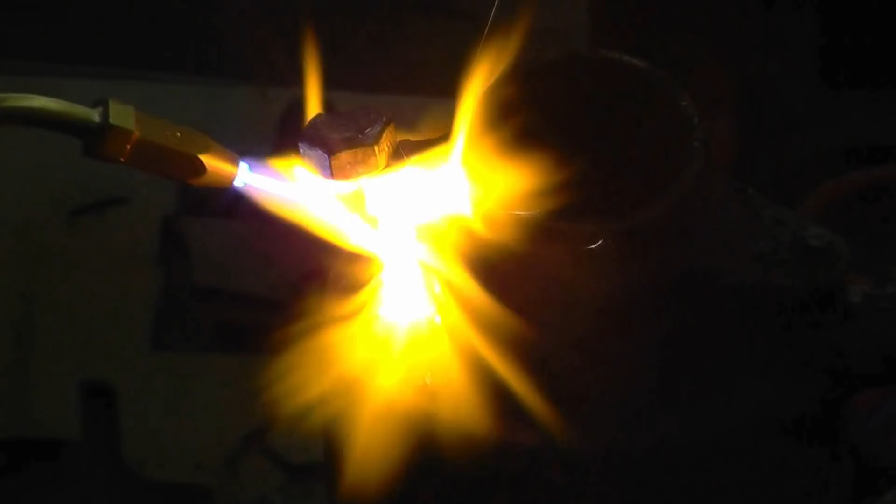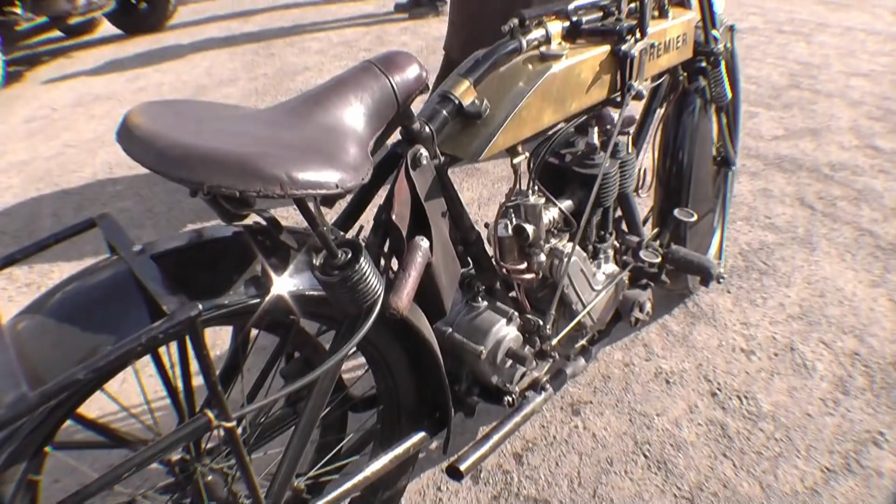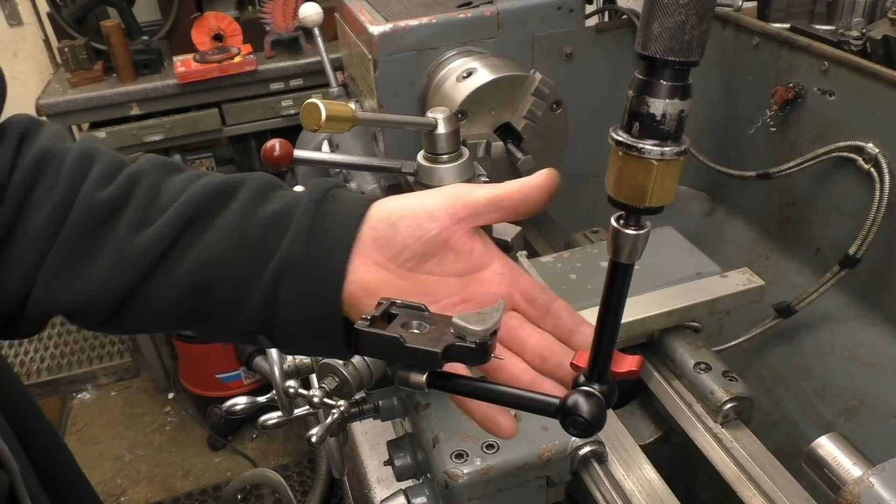I've had several people asking what sort of camera mount I use when I'm working on the lathe. This is what I'm using at the minute. I did have a ball end type affair on here, but I bought a cheap mag mount, or at least a cheap flexi arm that came with a mag mount on it, and I put a universal camera base mount on there. All my cameras fit into there. Depending on what I'm doing depends which camera I use.

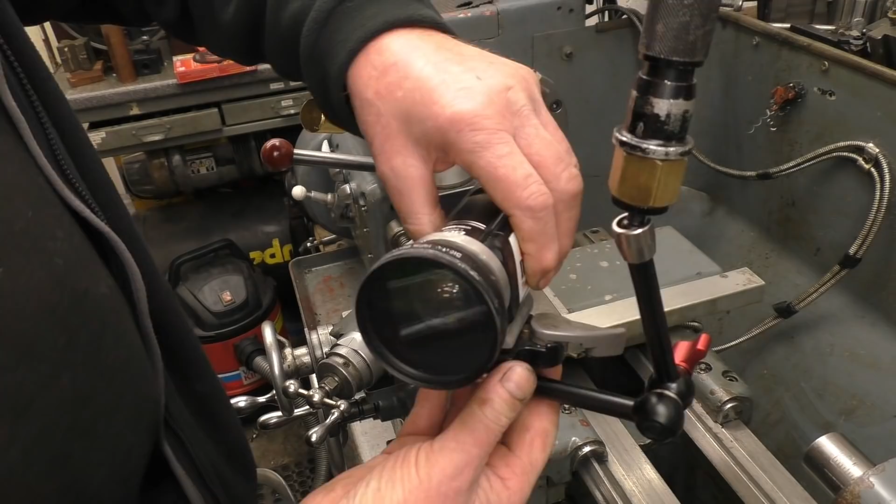The camera basically clips in. It's a fast release thing, so I can basically put this camera anywhere I want at any angle, and I can slide it along to get right in up to the chuck, basically anywhere I need, which is much better than trying to climb over the top of a tripod, which is what I used to use. So basically that's it.

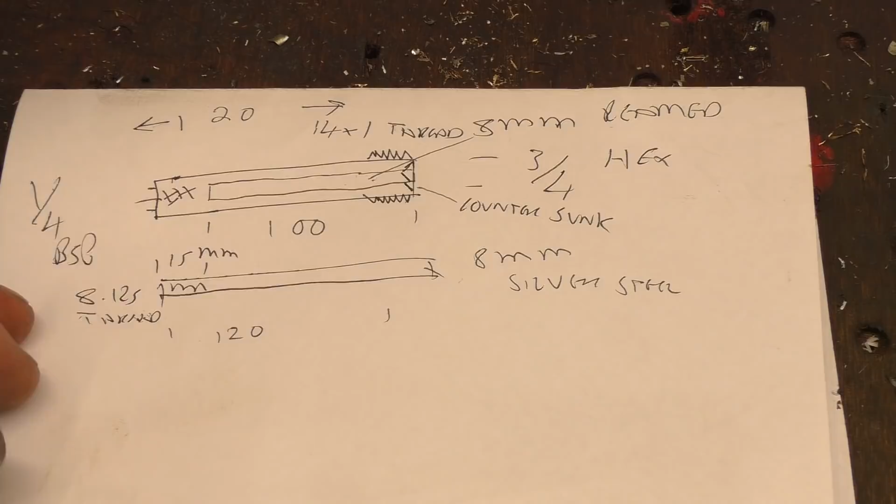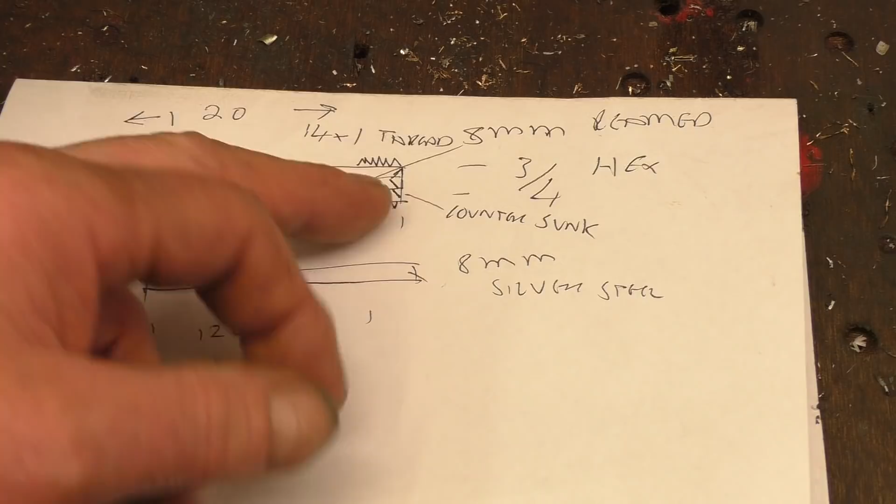I've got a rough sketchy type drawing here. It's a lot better than what I sometimes get. It's basically a piece of 3/4 inch hex brass bar with an 8mm reamed hole through the centre. Put BSP threads in there, 14x1 BSP on the outside, a little chamfer in there. It's basically going to be a pump.

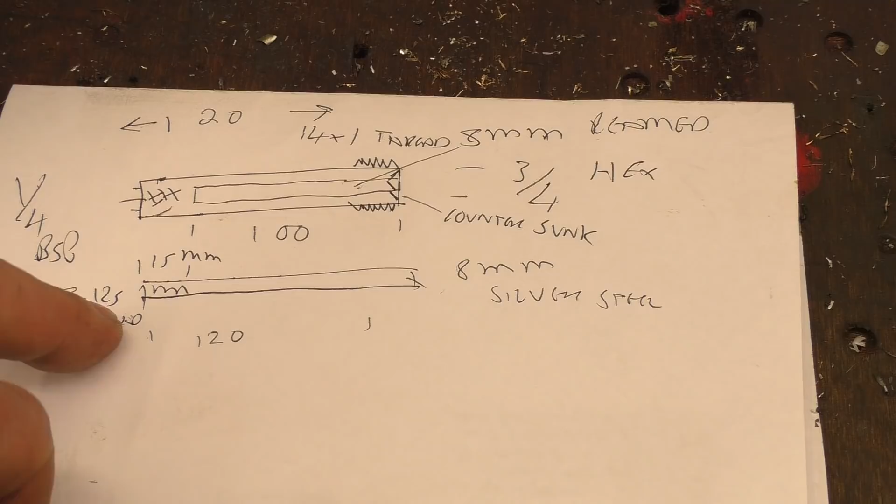Piece of 8mm silver steel to fit into it, 115mm long with 8mm threads on the end. He supplied a bit of brass bar. I've got some silver steel, so we'll see if we can get this made up for him. All the sizes are there. He did go through and explain exactly what he wants.

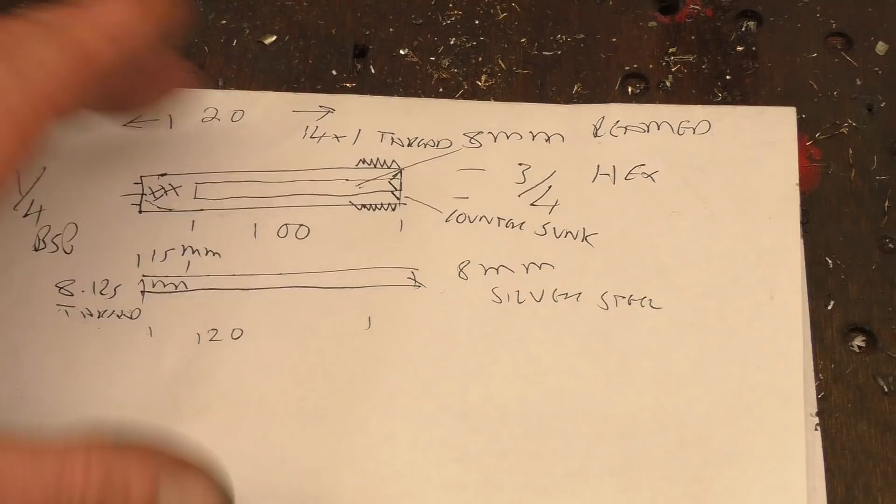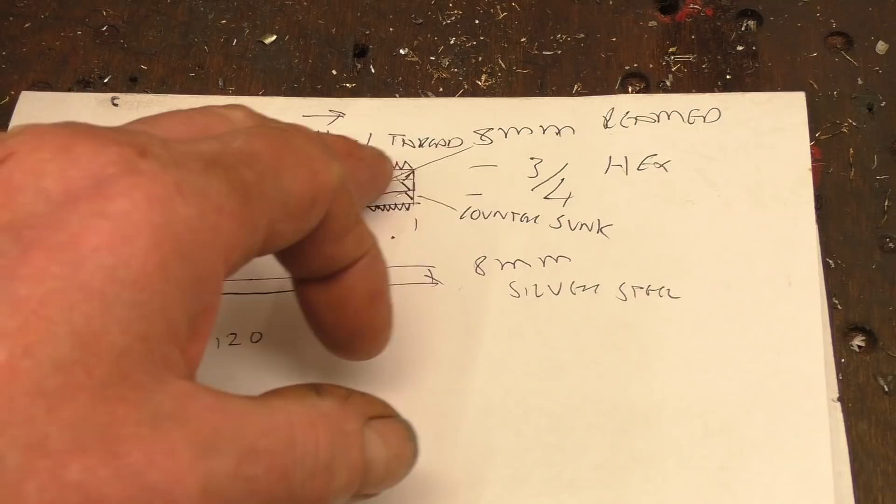There's going to be some packing that will go in there. There'll be a gland nut. I've got to make a nut for it. Maybe 18. Yeah, 14x1 is a bastardised thread, but I'm sure we'll manage it.

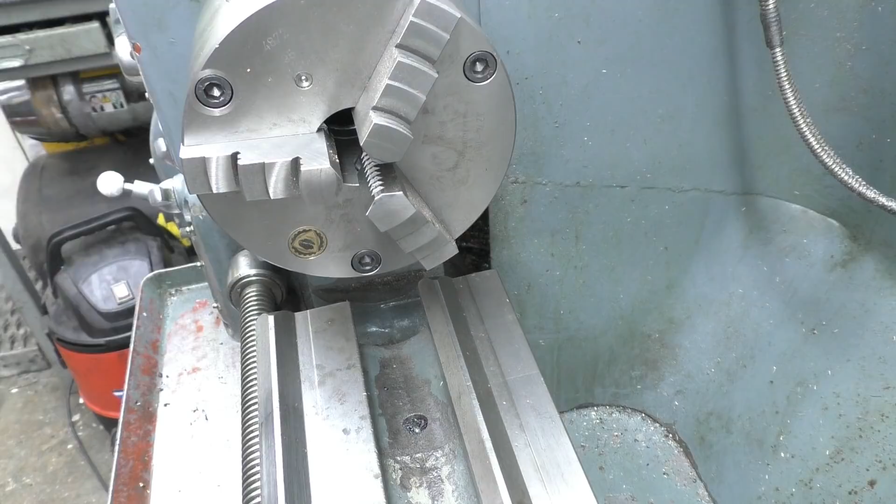The noise you're hearing in the background is my little diesel heater running, because it is not very warm in here at all. Definitely got a little bit wintry lately.

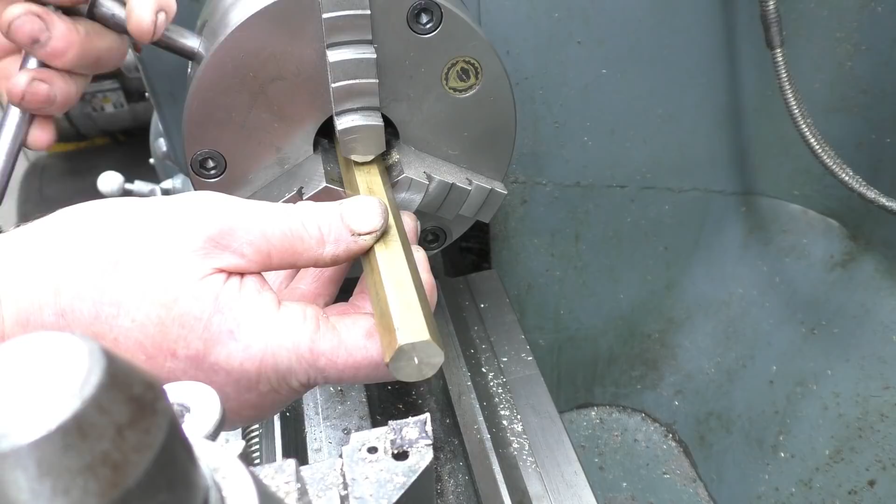I'll part this piece off to length first, and then put the external threads on and do the bore all in the same setting so everything's concentric.

I thought I had a 14 by 1mm nut to try on there, but I haven't. I don't want to screw cut that until I've got a nut to try on it. So I'm going to do the other end. I can put it back in the chuck and get it clocked in to get it running accurate. So I'll countersink this ready for his packing, turn it round and do the other end, and find out if I'm going to make a nut or if he has got a nut just to try on.

Quite a deep countersink because it's got to take a fair bit of packing.

I'm using the milling cutter to open this end up to 12mm to take the 1/4 BSP tap. The milling cutter won't dig in like a drill would. I've got a 1/4 BSP machine tap. Anyway, it's 1/4 BSP.

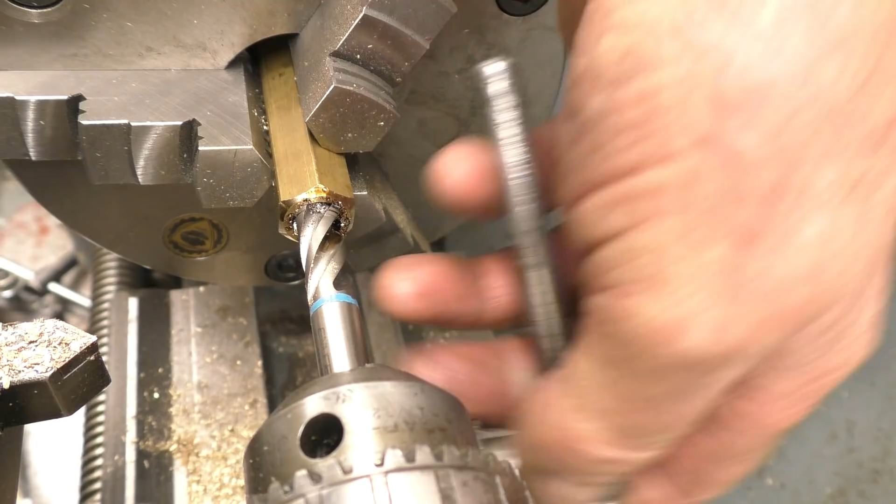I'm sure this trusty old Jacobs 3-jaw chuck will not slip. These get the same grip going forwards or backwards, if you can get them tight. What we'll do, we'll use the smaller chuck key, so it's a much better fit than the big one. Right, there you go. The old versus the new. Nice threads in there.

So basically this part's finished now, apart from the threads on that end. I'm going to put the collet chuck on and do the 8mm thread on the actual piston part.

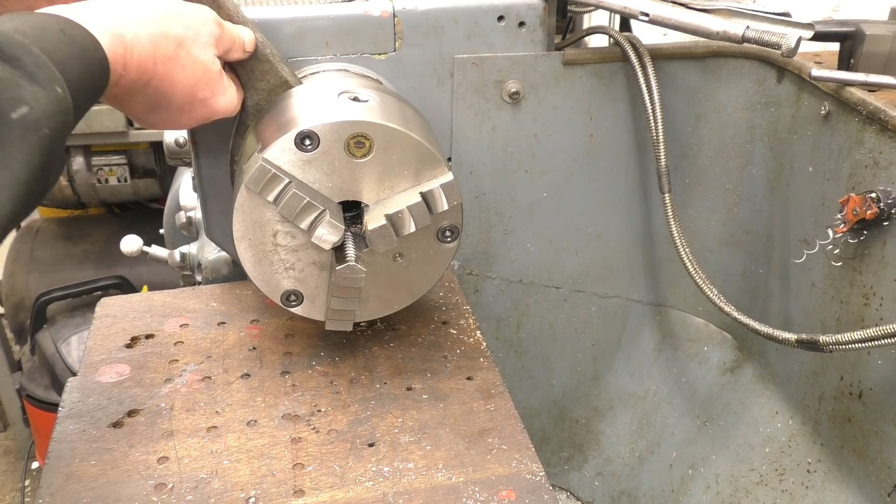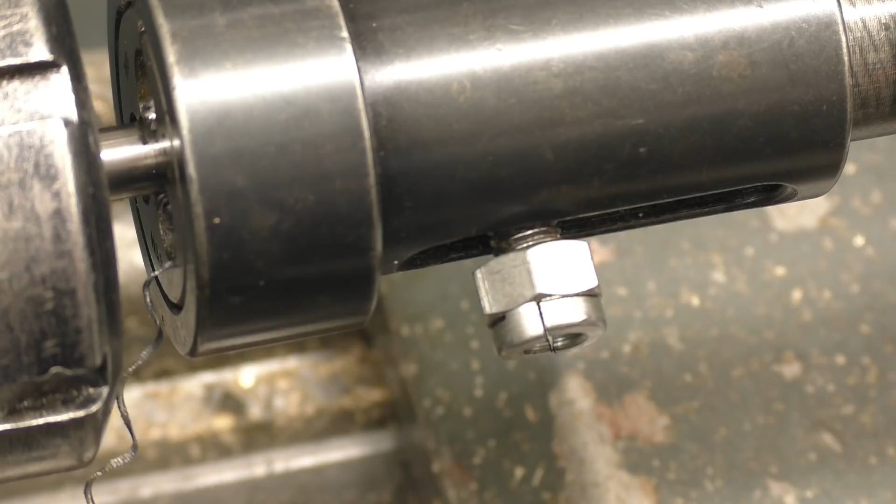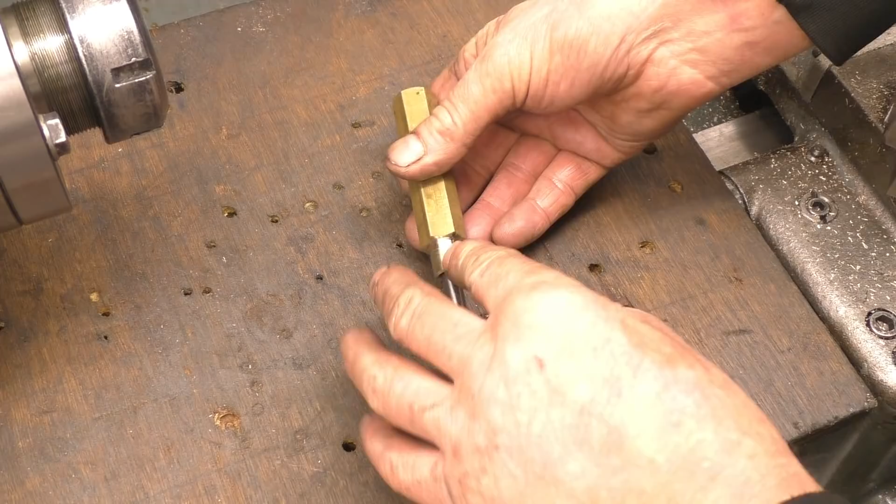That's a nice sharp 8mm thread. I'm using the collet chuck, so it wouldn't have damaged it. Right, that's basically done as far as I can go. I can get the nut for there. But it's a really nice fit in there.

And get the gland nut on there and some packing in. I'm not quite sure what's happening with this end. It must go into a valve body of some description, a non-return valve.